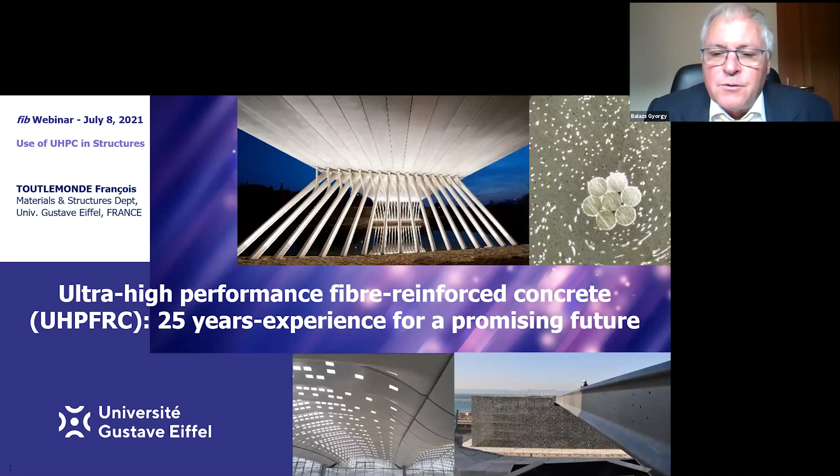I would like to begin with a personal word. I have to apologize because I won't speak in Arabic. I think one of the only words I know in this language is salam, which means peace, health, and salvation. I would first like to begin this presentation with these words, which I address to all the attendees from Iraq and other countries in the world. I want to say that it's my pleasure and my great honor to give you this presentation of

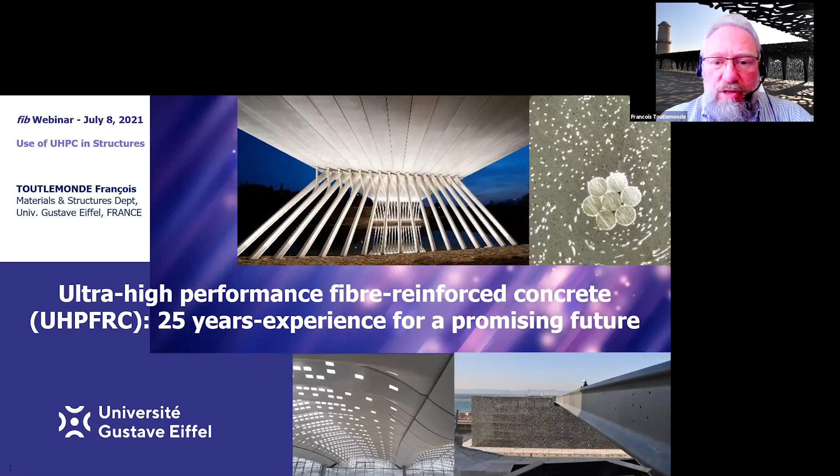Based on the experience of UHPFRC in France from 1996 to now, I would like to give some words on the definitions of what is UHPFRC, a short history of the implementation of these materials for structural usage. Then I will give some technical aspects of the properties of these materials and the way it's taken into account by the standards. I will give some description of fruitful or promising application fields, and we will have a special focus on UHPFRC for structural repair, and some conclusions.

So first, what's UHPFRC? I will illustrate this in my different slides with examples of this material. You see the example of a pre-stressed I-shaped beam that was one of the first applications of this material, used in France for repair in a nuclear power plant in a very aggressive environment. We have some photos with the material being cast or being mixed, and some shore views where you see that it's called concrete, but it's really not current concrete, and that's what I will try to explain.

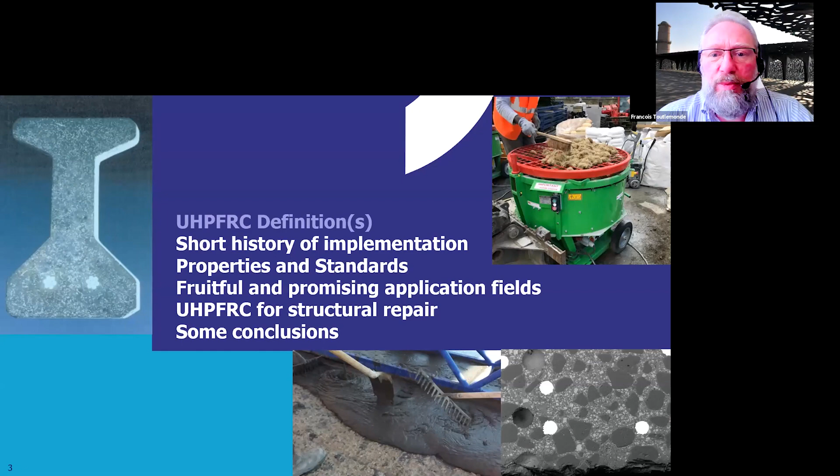What we understand in France as ultra high performance fiber reinforced concrete comes from the experience of the first mixes that date back 25 years ago: the reactive powder concrete developed by Bouygues, the BSI Ceracem by Eiffage, BCV by Vicat, and some other materials that now have new brand names like Ductal, BSI, SmartUp.

The main properties have been detailed in the first recommendations by the French AFGC, the French Association for Civil Engineering, which is the French branch of FIB.

The compressive strength was around 180 to 200 megapascal, as given in the recommendations edited in 2002, and later extended to 150 to 250 megapascal.

The direct tensile strength of this material is from 7 to 12 megapascal, and most importantly, the post-cracking stress for a typical 0.3 millimeter crack opening is also from 7 to 12 megapascal. So there is either hardening or softening behavior, but one of the key features of this material is that we can account on tensile capacity.

The Young's modulus is between 45 to 65 gigapascal, the total shrinkage is from 500 to 800 micrometers per meter, and the consistency at the fresh state ranges from self-leveling to viscous with threshold.

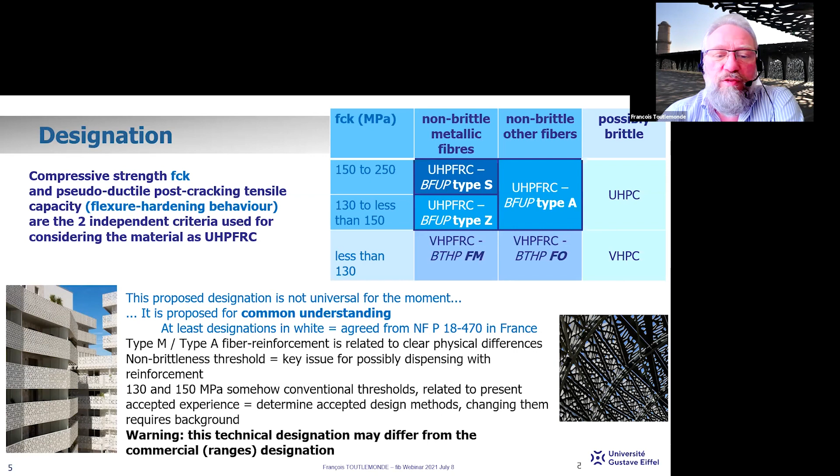A warning: this technical designation may differ from commercial designations that designate a range of materials extending from, say, 120 to 180 megapascal as compressive strength.

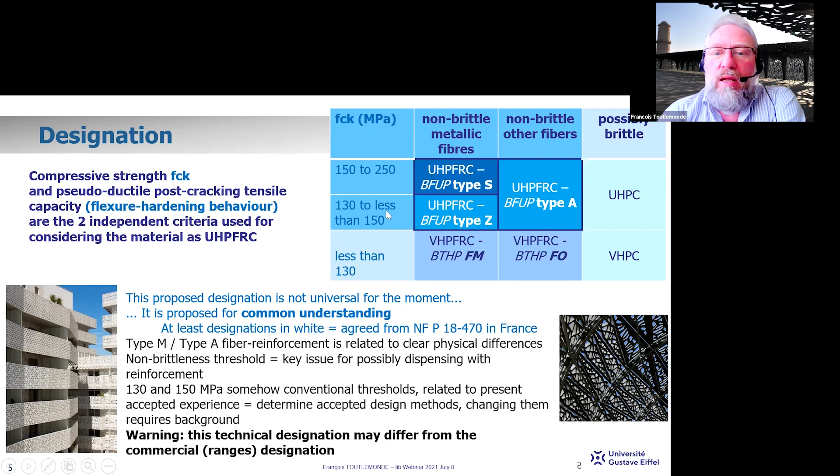So that was the generic terms you may have heard as engineers. But what I would like to explain now is more fundamental: what is UHP-FRC.

What we have to remind ourselves is that it's the result of the combination of three main ideas. First, the strength and compactness improvements of cement materials by intense reduction of the water to binder ratio. This was made more and more possible and efficient with R&D advances in superplasticizers and mineral additions. So UHP-FRC is a continuation of the macro defect free, or CRC, materials, beyond the HPC developed and used in the mid-80s.

This reduction in the water to binder ratio leads to modifications in the ratio between high density CSH and low density CSH. So this low water to binder ratio modified the balance between the hydrates in the cement paste. The second main idea, of course, is the fibers.

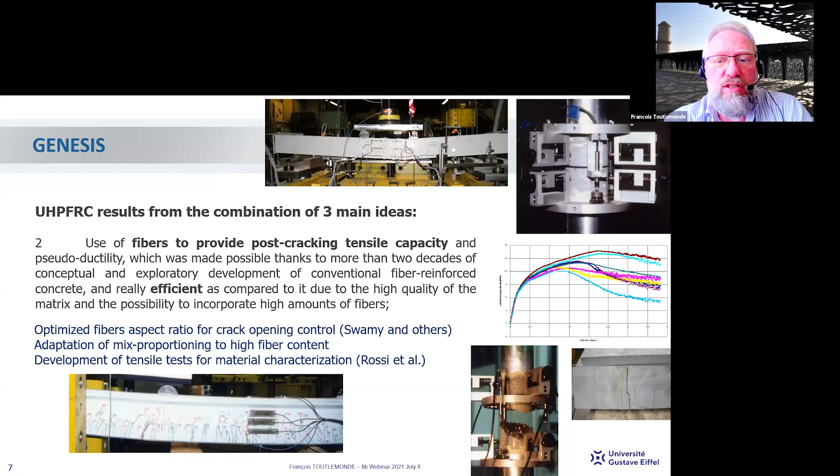The third idea is the reduction of natural imperfections due to aggregate, made possible by limiting the size of natural aggregates and selecting very high quality materials in an optimized grading. This took benefit of aggregate packing models developed in the late 80s, for example by de Larrard and other co-authors, and also took advantage of ultrafine additions developed from the 1980s, especially silica fume, which was used more and more.

From a human perspective, UHP-FRC is also indebted to pioneers who combined the three main ideas. I want to mention Pierre Richard, Marcel Cheyrezy, Gérard Birelli, Thierry Thibault, Gilles Chanvillard. These people were convinced that combining these three ideas could open the way to new horizons for cement materials. They promoted this combination as an answer to badly answered demands.

It was necessary to reduce the local brittleness of concrete materials, governed by material defects. UHPFRC had to promote industrial control in construction processes and products. It was a possibility to optimize the use of cement in a high added value material, which also had an economic value in terms of

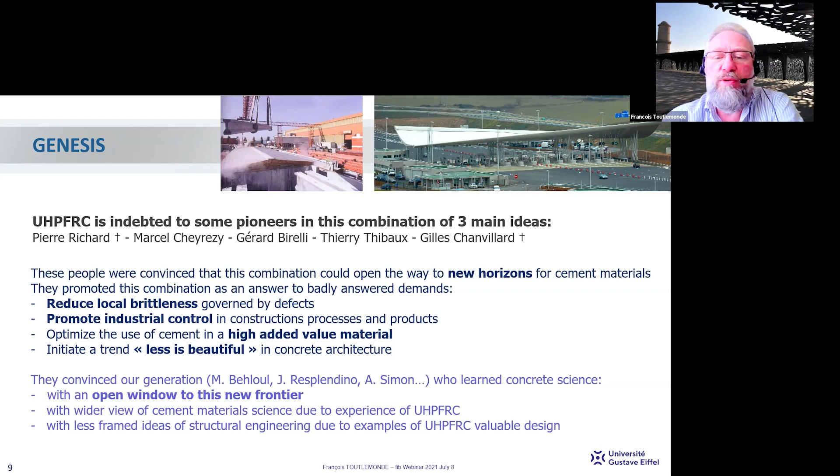That's the experience I would like to share with you. I will begin with the basic steps from the history of this material, and the first step I will call genesis, from the laboratory to the first demonstrators.

Let's remember, in 1990 the maximum strength in the French design code was just changed from 40 to 60 megapascal. Five years later, Richard and Cheyrezy presented the BPR 200 at the ACI convention, the conclusion of over 4 years of industrial development of mix proportioning and qualification.

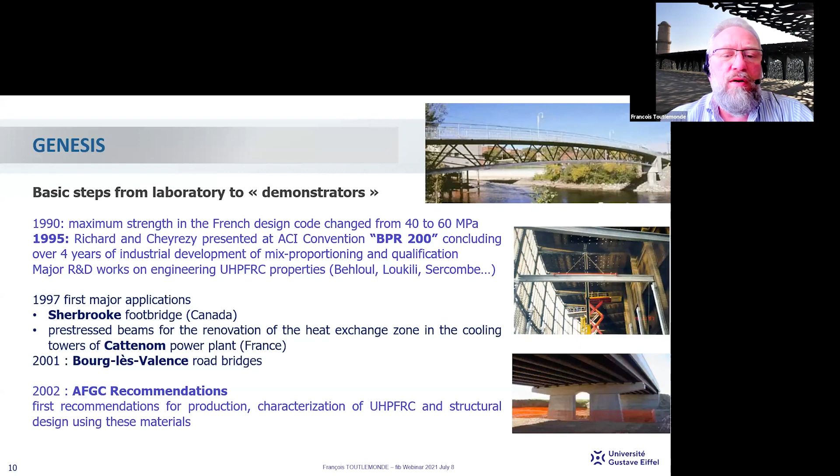And it was also the result of major R&D work on engineering UHPFRC properties. This led to the first two major applications in 1997: the Sherbrooke footbridge, and the pre-stressed beams for the renovation of the heat exchange zone in the cooling towers of the Cattenom power plant in France—about 3,000 beams and girders to support the heat exchangers. Just four years after, the first road bridge in Bourg-lès-Valence led to the first recommendations on these materials. So really, it's a short period of developing the materials and having the first real-size applications.

At this stage, the major features that are still valid now: the UHPFRC materials were industrially controlled, patented materials—a limitation that is now overcome. But what is still true is that it markedly surpassed the highest high-performance concrete available at the time. The minimum compressive strength at this stage was 150 megapascals. The post-cracking effective capacity possibly dispenses with the traditional use of secondary reinforcement. And because of the outstanding durability, with transfer coefficients at least 10 times lower than for standard concrete, it was anticipated that reduced covers could be used. What's important for the future of this material is that there was recognized a common interest of all stakeholders in scientific advancement and development of relevant implementation.

So UHPFRC was understood, I would say, both in continuity and as a breakthrough. The outstanding compressive strength properties promoted extreme optimization of pre-stressing, and the durability and lightness of pre-stressed members appeared as main advantages to be sought in structural applications. The absence of secondary reinforcement dispenses with keeping systematic continuity with traditional reinforced concrete design provisions. So the trend was to develop plain thin UHPFRC elements, which appear feasible. Finally, mixing, placement, thermal treatment, and formwork technology could be understood in continuity with the self-compacting concrete technology that was emerging and being recognized at this step. This was also very helpful in making the first applications.

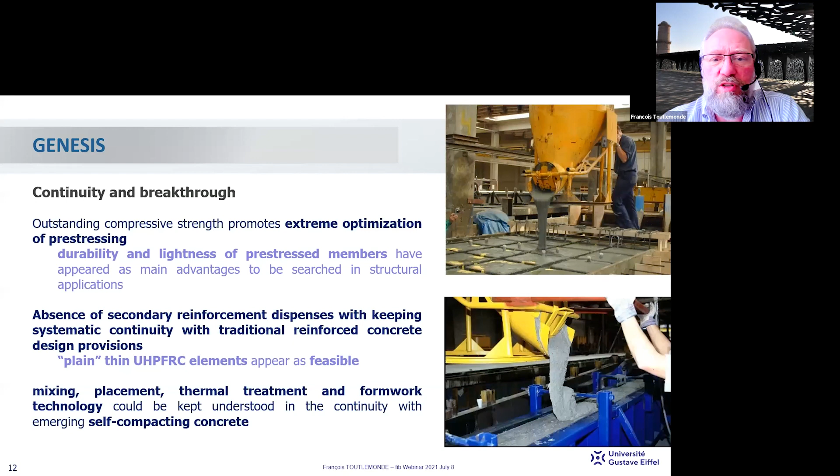So I'm sorry for this introduction that was a bit long, and I think Raad, you can give a summary of what I've tried to say in Arabic now.

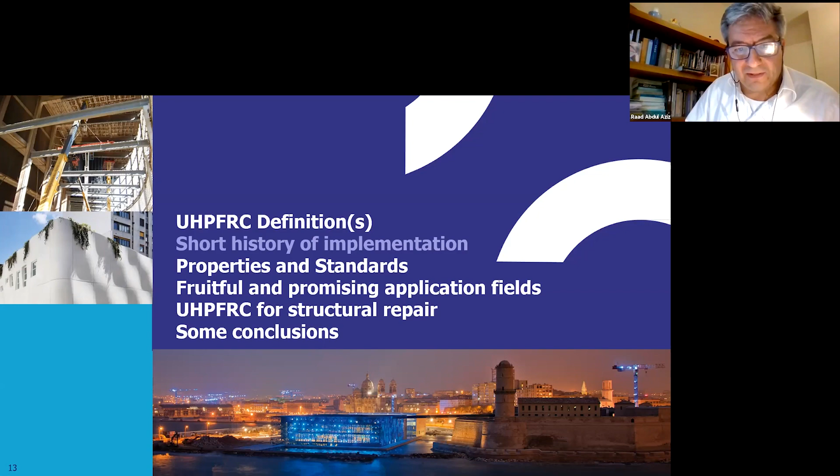Thank you. I will give now some illustration of the short history of implementation of this material.

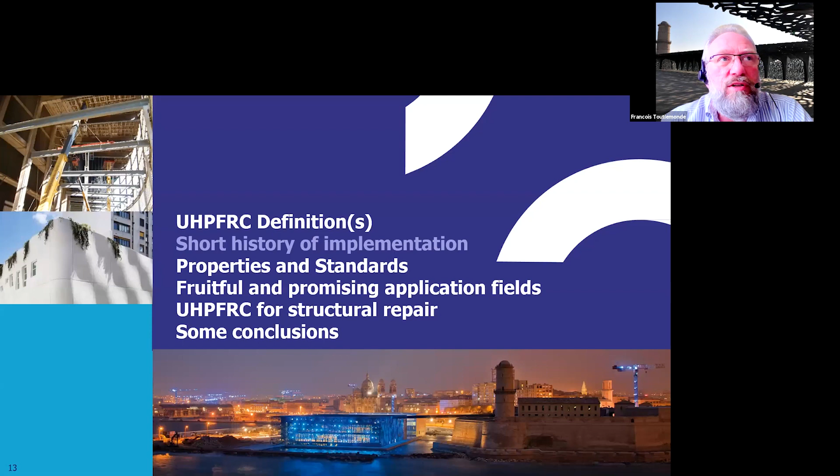Let's come back to 2002, where we have the first recommendations for designing and using this material. For the first decade, I would say the keyword is exploration, so architects and engineers tended to find the proper shapes in applying these materials.

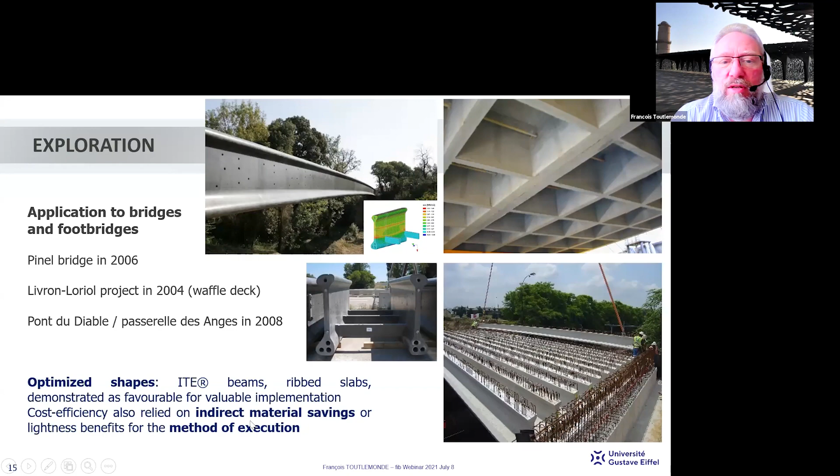So it was the discovery of new aesthetic possibilities associated to the durable mineral surface quality of this material, lightness and possible complex shapes, and a kind of semi-transparency with these net panels.

And this leads also to the development of the use of UHPFRC with organic or stainless steel fibers because of the durability of the aspect. And it leads to an extended range of mixes addressing the fire-resistant demand for buildings, and also a possible compromise between these properties and lower strength requirements.

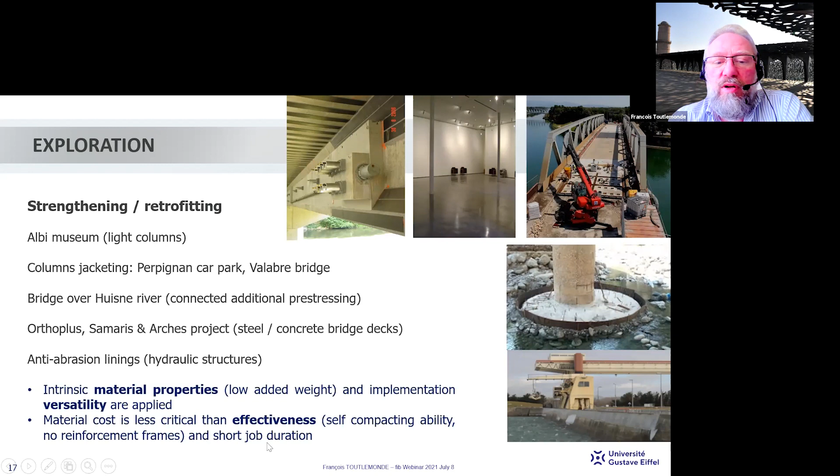These were really the first cases of these applications, and also anti-abrasion linings for hydraulic structures. The intrinsic material properties led to low added weight, and the implementation versatility thanks to the fluidity of the material were really critical for these applications. The material cost is less critical than the structural effectiveness, given the self-compacting ability, the absence of reinforcement frames, and the possibility of very short job durations.

Not only in France but in some other countries, these were the first implementations showing the optimization of technical solutions for civil engineering. In these cases, UHPFRC is somewhat less visible, but it's technically optimized, and it also corresponds to a business takeoff.

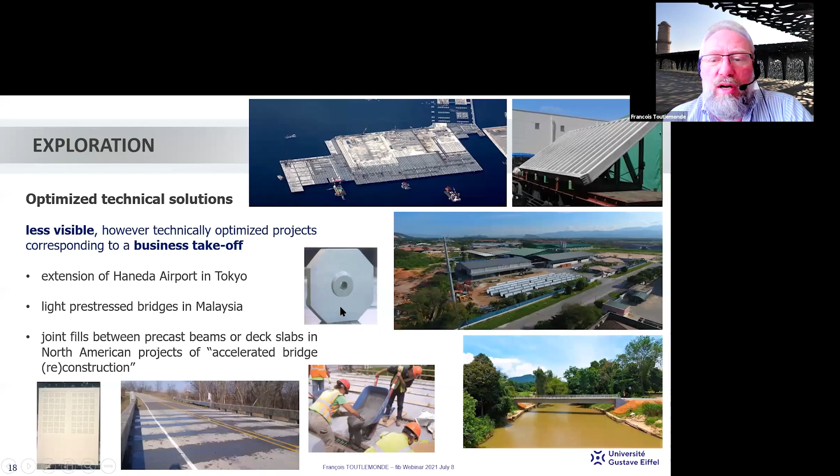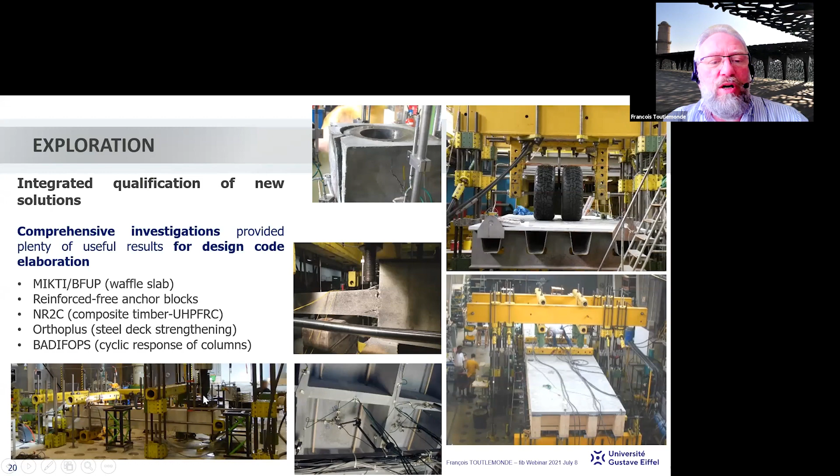This research was not only at the material scale but also involved integrated qualification of new solutions. For example, the qualification of reinforced free anchor blocks for post-tensioning, development of timber-UHPFRC composite solutions for short bridges, development of UHPFRC overlay to stiffen steel deck bridges, and here a test of a column with both axial compression and the effect of a seismic load applied transversely.

The year 2013 corresponds to a milestone for UHPFRC in France after this phase of exploration. We had an international symposium on this application, and we were also able to make a revised edition of the recommendations, taking experience from all these projects. What's important, we also have the inauguration of two iconic projects associated with urban renovation: the MuCEM in Marseille, and the Jean Bouin Stadium in Paris. This made really a wider awareness of the technical and architectural capabilities of UHPFRC, both among professionals - architects and engineers - and for the public, including clients of the constructions. Also, the technical acceptance of the design of industrial processes and details associated with these large projects, as well as the previous satisfactory experience of building components and bridges made with UHPFRC, made it possible to launch the standardization process in France.

So, some illustration of these key demonstrative structures and applications. The MuCEM is a museum on the Marseille harbor. For this project, there were more than 300 net panels for the facade, about 2,000 square meters of thin deck slabs, more than 300 tree-shaped columns, post-tensioned columns, and 2 footbridges that you see here, about more than 70 meter span. And here what you see are the hangers for the external decks.

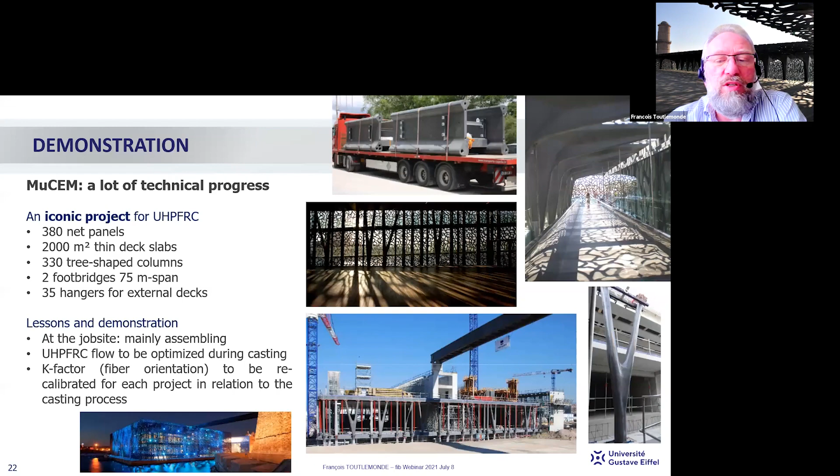Main lessons of this project: these were mainly precast elements assembled on site. For the realization, the UHPFRC flow turned out to be optimized during casting, and this was quantified with the fiber orientation factor, which had to be recalibrated for each project in relation to this optimized casting process.

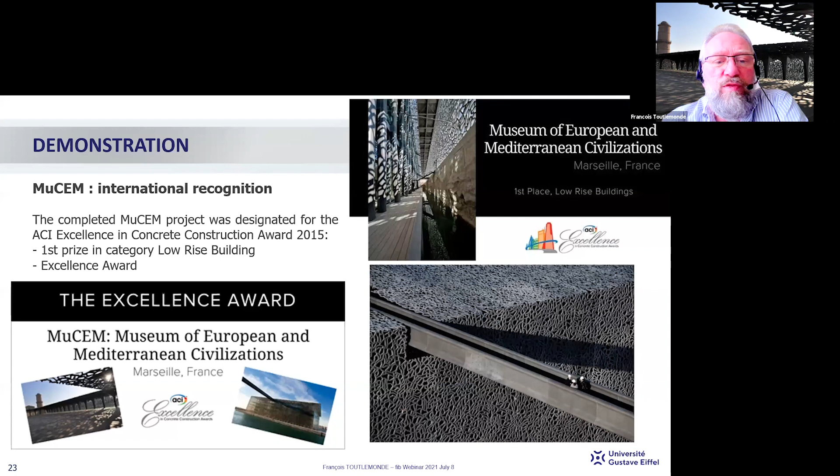There was also, which is important for the development of a material, international recognition with the ACI Excellence Award for the museum in 2015. And also the same year, the Jean Bouin Stadium obtained recognition for the category of decorative concrete for the same ACI Excellence in Concrete Construction Award.

So there's a chain between characterization of the material, design optimization, and optimization of the casting process to avoid disturbed flow zones without the fibers, especially because the net panels had to receive glass blocks in between. So it was really necessary to demonstrate the ductility and structural continuity of these elements, because of an issue of public safety that had to be demonstrated.

I just mentioned in the same period the renovation of the Chillon viaducts, but Dr. Raad will give more explanation of these really demonstrative applications of UHPFRC for bridge rehabilitation.

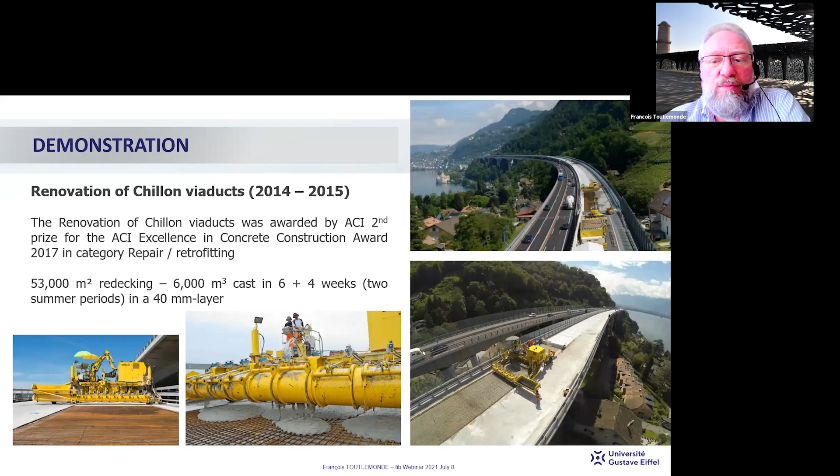I think, because the explanation is very clear, I will just give the headlines of this part.

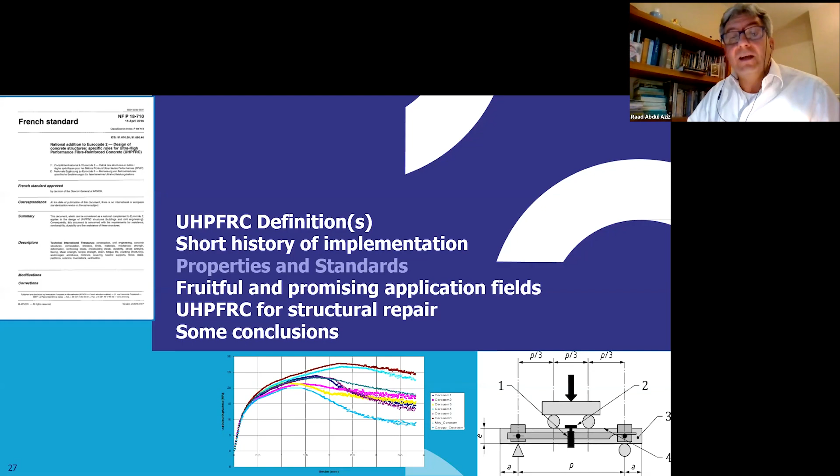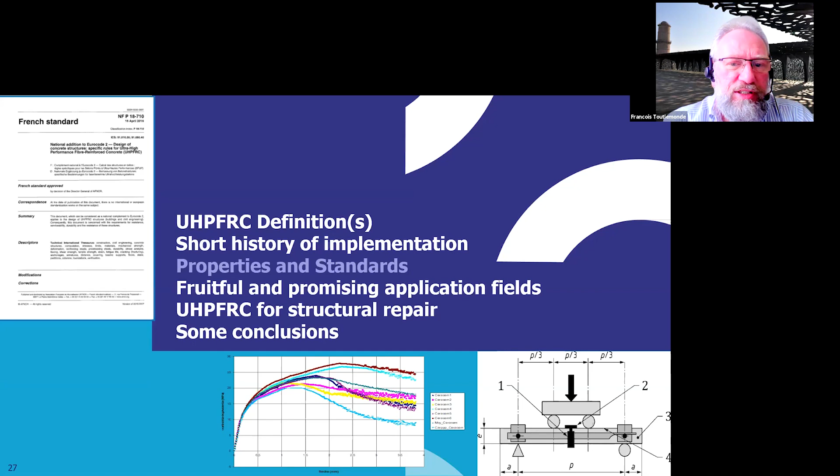So let's have now more detailed explanations of the UHPFRC properties as described in the standards. The motivation for standardization appeared as a key step for the growing business made possible by the successful applications that I presented.

The idea was to clarify the specifications and accepted design rules, to have fair competition among solutions, and easier acceptance of UHPFRC solutions from owners and insurance companies. There was a growing awareness among all interested parties, so the standards could be elaborated in groups with all stakeholders and experts represented.

And of course, the standards were also more easily developed based on the consensus of what we had in the recommendations, and the consolidated experience gained over the 15 years before.

The standards sought to comply with the FIB Model Code 2010 principles available at this stage, and also with the format of European standards, which made implementation and understanding easier at the international level. What's also key for the standards elaborated in France is that we needed wide purpose standards.

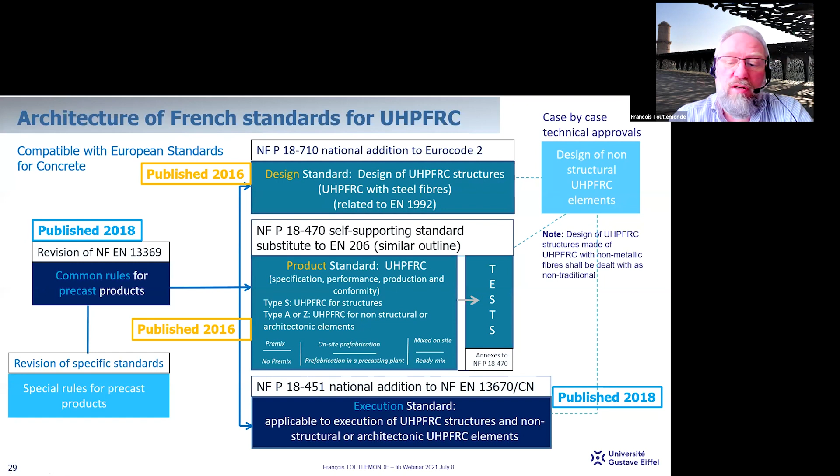What's still not covered is the design of non-structural UHPFRC elements, especially made with non-metallic fibers, because at the moment of elaborating these standards, it was considered that there wasn't enough experience with this type of material.

I'll try to give you briefly some of the key features of these standards. For the design, as a national addition to Eurocode 2, the frame of Eurocode is kept and many clauses are unchanged. We follow the Eurocode outline, which clarifies the way we express the requirements.

Based on the practice validated from the beginning of the implementation of the material, the tensile capacity of UHPFRC is taken into account even when cracked, and this makes it necessary to define a specific partial factor. The effect of fiber distribution is taken into account with a set of orientation factors.

The cover to reinforcement or tendons is reduced due to the high durability, but the quality of placement imposes a cover thickness higher than 1.5 times the length of the fibers, except where demonstrated more specifically.

The ULS cross-sectional design is based on a diagram of admissible strain, so it's really in continuity with reinforced and pre-stressed concrete. But the cases of reinforced or pre-stressed concrete versus plain UHPFRC have been clarified with the specific ultimate strain to be met in this diagram.

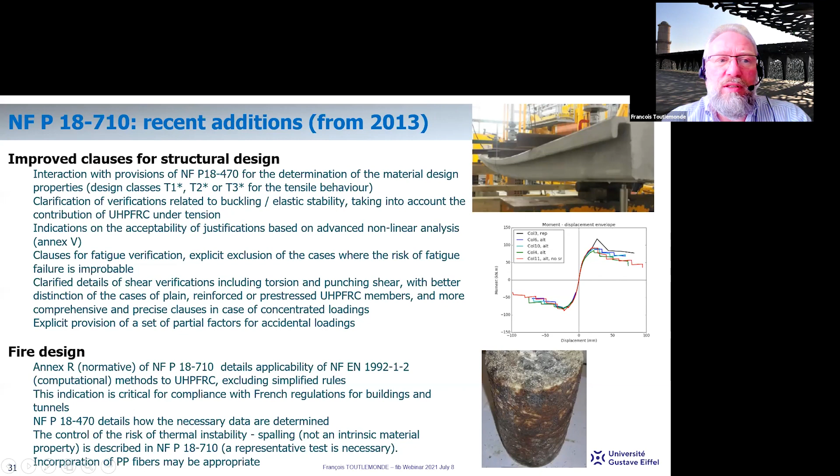Let's go to the material standard. It gives the minimum requirements to call a material UHPFRC. As I've said before, there is a criterion in terms of compressive strength higher than 130 megapascal and 150 for structural applications, and a minimum elastic tensile strength of 6 megapascal.

A minimum non-brittleness rule is expressed as a post-cracking tensile equivalent stress between 0 and 0.3 millimeter crack opening, higher than 40% of the elastic limit and higher than 3 megapascal.

Minimum durability properties include water porosity lower than 9%, a chloride diffusion coefficient lower than 0.5 times 10 to the minus 12, and a gas permeability lower than 9 times 10 to the minus 19 square meter.

For easier specification, classes are given for compressive strength, for description of the tensile behavior (softening or hardening), classes for improved potential durability, consistence classes from self-compacting to viscous with threshold, classes related to thermal treatment, and abrasion resistance classes.

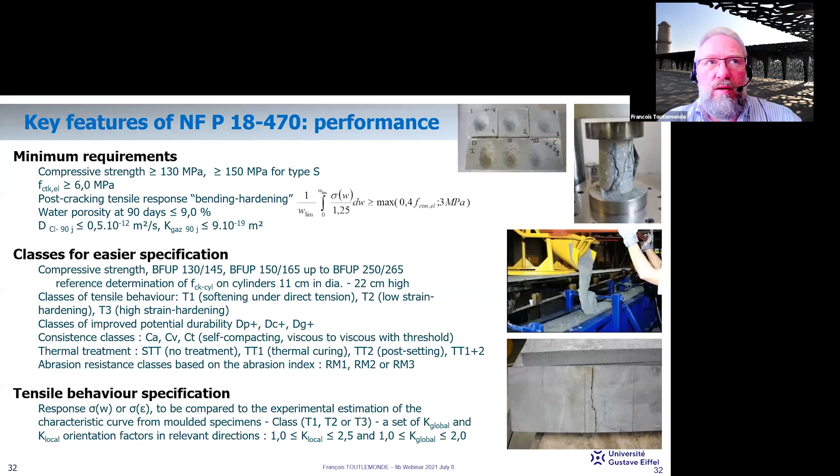A set of orientation factors is given and has to be checked in the relevant directions. This orientation factor has to be between 1 and 2.5 for the local factor, and between 1 and 2 for the global factor. This may lead to reconsidering the way of casting the material so that the orientation factor is consistent with what is necessary for the tensile forces equilibrium in the project.

This leads to a special chain of conformity assessment for this type of material. There is a design study carried out by the producer to verify that the mix allows meeting the project requirements and is robust enough for the project.

When there is an identity card, this may replace the design study. But a key step that is not so classical for concrete in general is the suitability test, which is part of the initial testing and is in fact a trial production. The aim is to verify that the required properties are met in the specific production conditions of the project, and it fixes the effective production and mixing process, the transport procedure, the procedure of placing, finishing, curing the material, and the protocol of thermal treatment, if any.

This comprises the production of a representative prototype element carried out under the responsibility of the user of the UHPFRC, to check whether the specified performances are met, especially the orientation factors. This is really a difference with classical concrete, in that the user of the material is also partly responsible for the conformity of the material.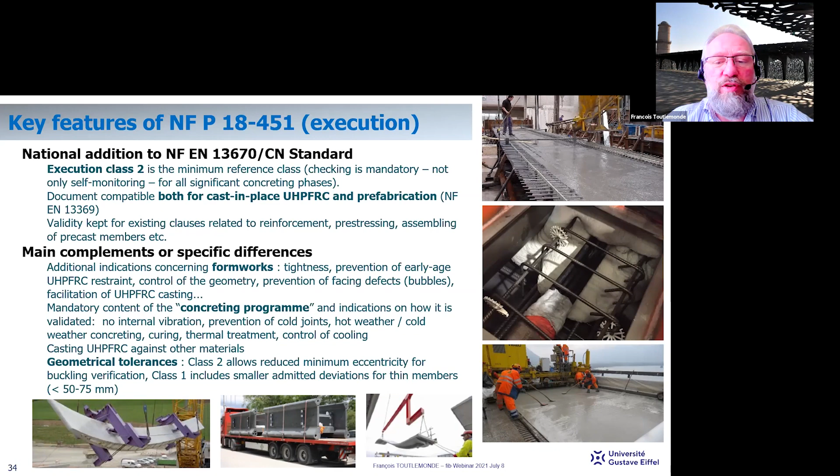The last main part of this standard is the geometrical tolerances. There are two classes, and especially there are smaller admitted deviations for thin members that differ from what is in the present standards.

As a conclusion of this part, what's the situation now with the standards? We can see that all UHPFRC mixes are not similar, so the list of characteristics necessary for projects is clearly longer than for regular concrete, and prescribers have to become aware of this.

It saves time to use UHPFRC mixes with identity cards, because we already have a first control that material properties will be met for the project. This is a matter of specific care in case of alternative bids in answering tenders. And what's important, maybe more critical than in classical concrete, is the interaction between material and design, which of course has an incidence on costs and methods.

What has to be kept in mind is that UHPFRC is not only a premix nor mixed proportions, and the suitability test is critical to validate the concreting process and program, post-casting treatments, meeting the K-factor requirements. This is a matter of combined responsibilities of the UHPFRC user and producer.

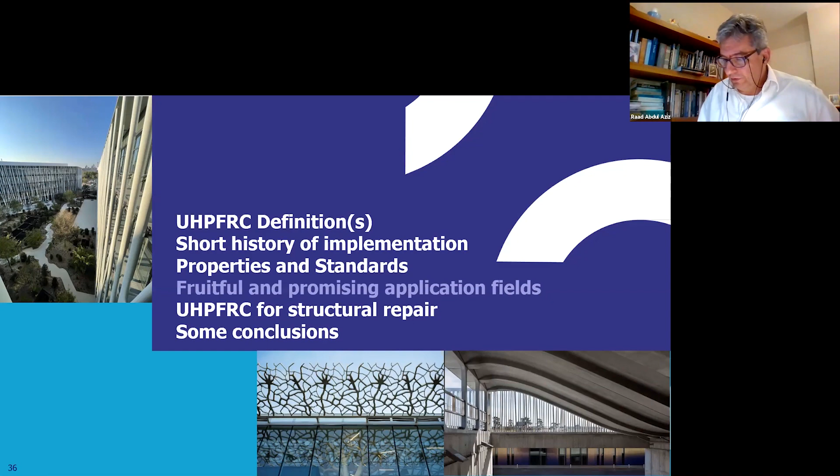So I would try to give you now a picture of what can be considered as the fruitful or promising application fields of this UHPFRC material, based on the present trends, especially in France, though the situation can be diverse in other countries, but it can also give you some ideas.

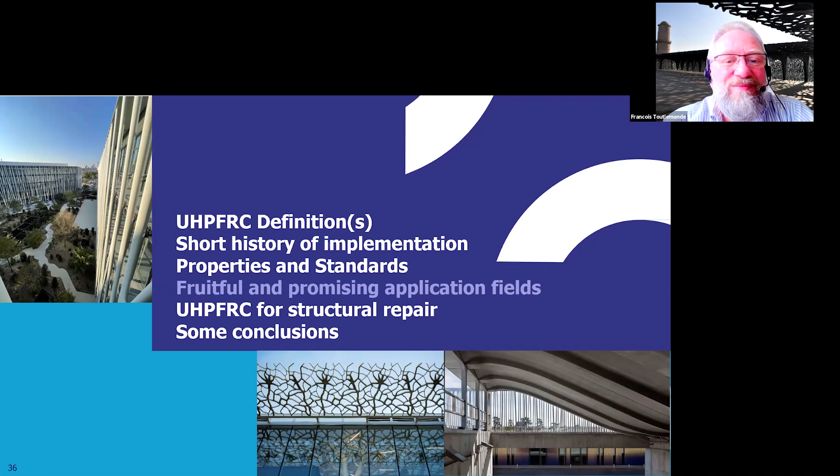So first, I come back to the applications in footbridges. What is searched for in these applications is slenderness and lightness. We have records of slenderness, for example, for the Angels footbridge. What's taken benefit of is the performance in compression associated to post-tensioning, the performance in tension for the transverse bending and shear, and the cost efficiency for the erection with lighter false work.

What's also interesting is the architectural versatility - we have examples of truss, of Pi-shaped, of side beam supporting structures. For these structures, one point to be aware is the critical control of vibrations. I think an issue for the future is the balance between signature bridges and replicability, which is in the sense of cost efficiency.

As an example of repeatability, there was an optimization of the inverted T-shaped beams with a widened flange - that's the symbol of ITE in France. This shape was optimized for prestressing efficiency, which enlarged the capacity of the lower flange. The introduction of the pre-stressing force is shifted because there are a lot of tendons, as you can see here. There are no stirrups for shear except at the end for the highly skewed bridges.

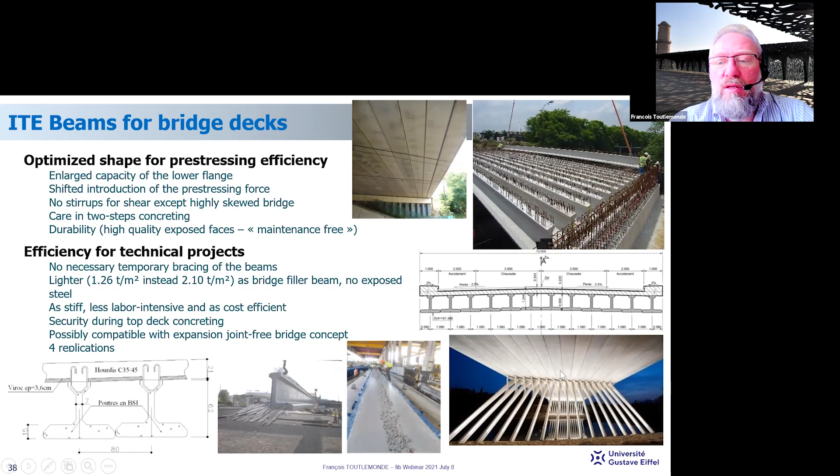So there are 4 applications for the moment of this type of solution, and here especially the La République bridge in Montpellier, where you see the deck is made of these T-shaped beams.

Another favorite shape for UHPFRC application is columns, because it's a direct application of the compressive strength performance. There's the possibility of ultra-thin columns, for example in case of buildings retrofitting, or ultra-thin jacketing for increasing the load capacity. It can be applied for a self-supporting facade, or for external thermal insulation of a building.

And the architectural versatility is made possible by the material performance, with this type of tree-shaped columns.

Some points to be addressed: the buckling verifications with respect to the tolerances, the fire resistance requirements if relevant, have to be integrated. The seismic behavior and the ductility have to be assessed, and this may require some specific justifications. Also, one of the key aspects is the optimization of the assemblies when these columns are very high, so as to have durable and efficient solutions.

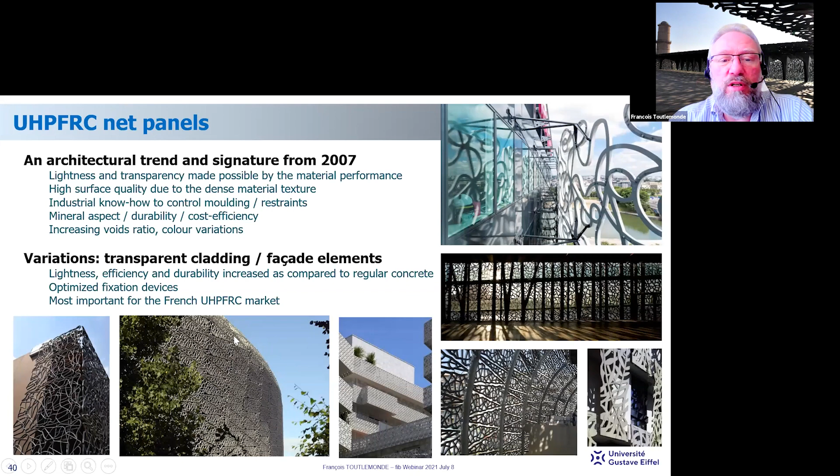In the continuity of these elements, the roofing elements are generally made of larger shells. So it's a key field of application for architecture. The lightness allows larger spans. The cost efficiency is based on the low dead weight in a global design.

So some variations for this type of applications. In case of ribbed solution, depending on the span, there could be reinforcing steel or post-tensioning. There could be ribbed plates or shells. Here again, one of the key conceptual design issues is...

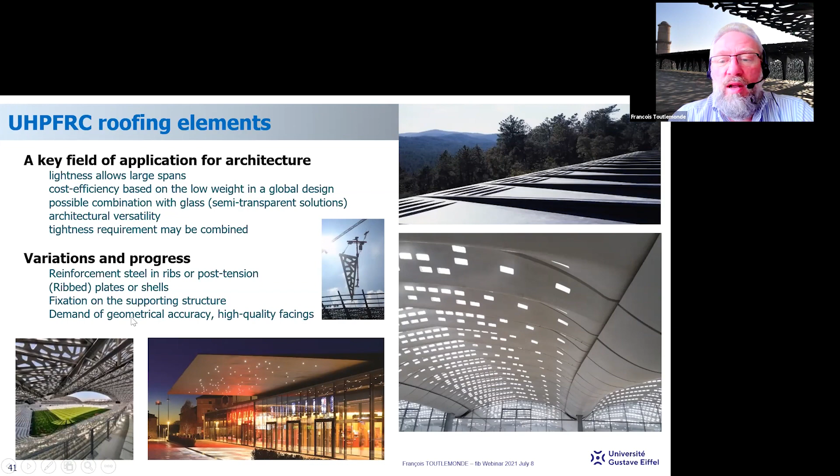...the way it's fixed on the supporting structure. And of course, it demands high geometrical accuracy and high quality facings, which is an important skill of the precaster.

I'll briefly mention here the contribution of UHPFRC for structural strengthening, because these solutions are more and more adopted because it's generally low intrusive - the performance of the material makes it possible to keep the material addition light, and it has a limited incidence on the supports.

So it takes benefit of the material performance in compression for longitudinal bending and in tension for transverse bendings on supports. Both performances are applied for the post-tensioning anchor blocks.

Because of the high Young's modulus, the UHPFRC additional elements may keep the flow of forces, which alleviates what is taken by the existing structure.

And of course, it takes benefit of durability, tightness, resistance to abrasion, and the compatibility with the existing steel or concrete support. The condition of optimal implementation is...

...the fact that the material quantities can be saved so that the material cost is not so much critical. The material, the works execution, and the logistics have to be optimized simultaneously.

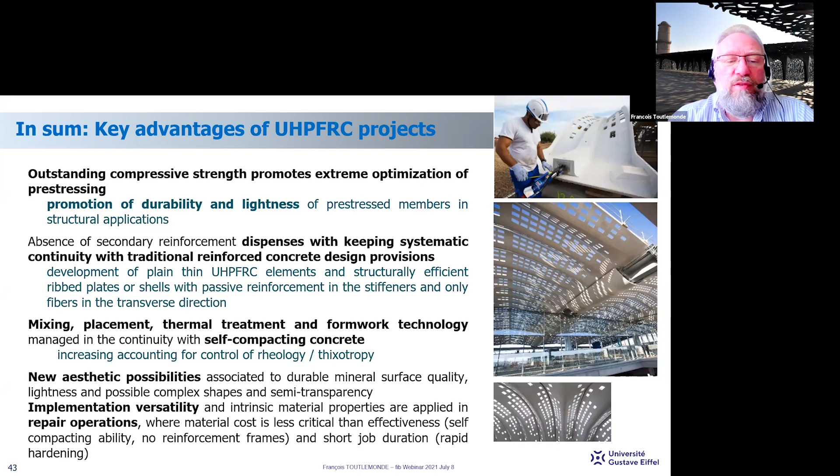Okay, as I said, the implementations for repair operations is also very attractive. I think we have the Arabic translation, and then I will focus on the use for structural repair with some examples.

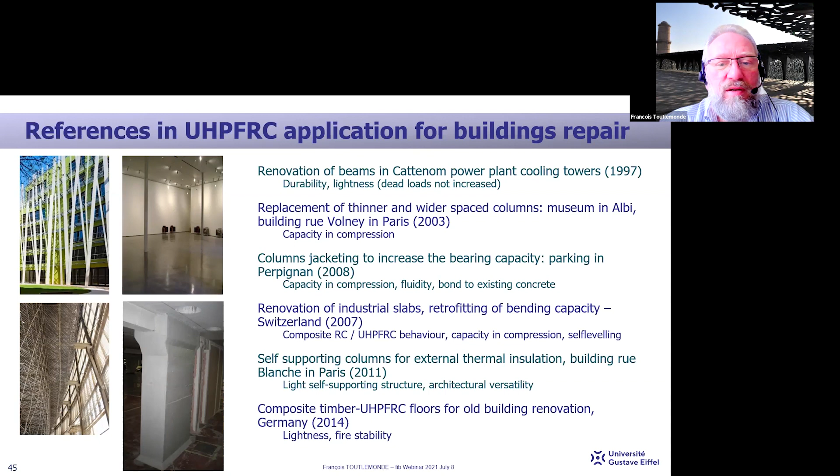I mentioned the steel bridge deck strengthening because we have a generic issue with orthotropic deck bridges, at least in Europe and Northern Europe, because these structures are very much sensitive to fatigue, especially at this junction between the troughs and the plate.

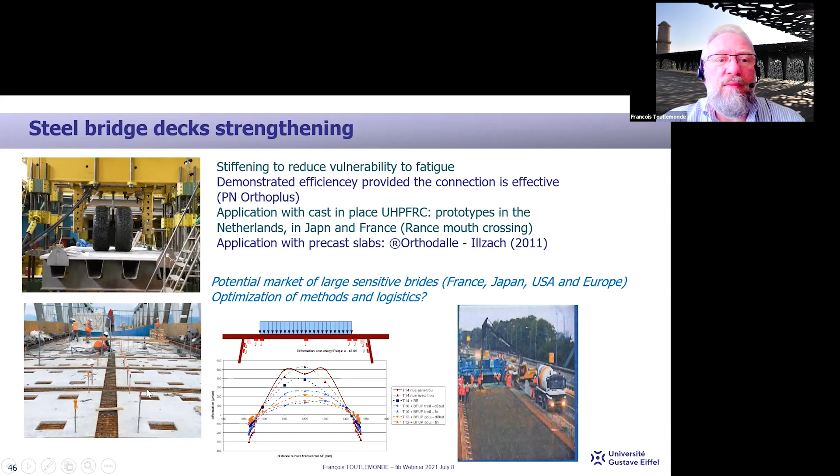I will be very brief on the stiffening of concrete bridge decks because this has been mainly developed in Switzerland from the European project Arches and Samaris, with the example of the Chillon Viaduct and more than 100 bridges.

One question for me is why this is a very important market in Switzerland and not really effective for the moment in France, although we have some zones where we have an intense use of de-icing salts, and this preventive maintenance approach would be probably more cost efficient.

So this is probably a future market for the retrofitting of composite bridges, and also for the widening of urban bridges or bridges under heavy traffic because of the possibility to reduce the duration of the job site.

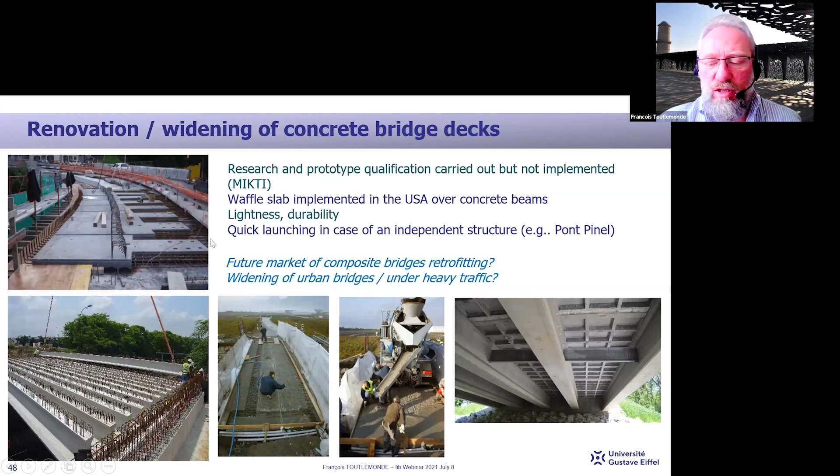I illustrate with two examples in Thouaré-sur-Loire and Mauves-sur-Loire, cases where we had a full deck reconstruction. These are long steel bridges where the deck was formerly made of brick vaults, and the steel beams were damaged by corrosion because these vaults' water tightness was lost, and the vaults were much damaged.

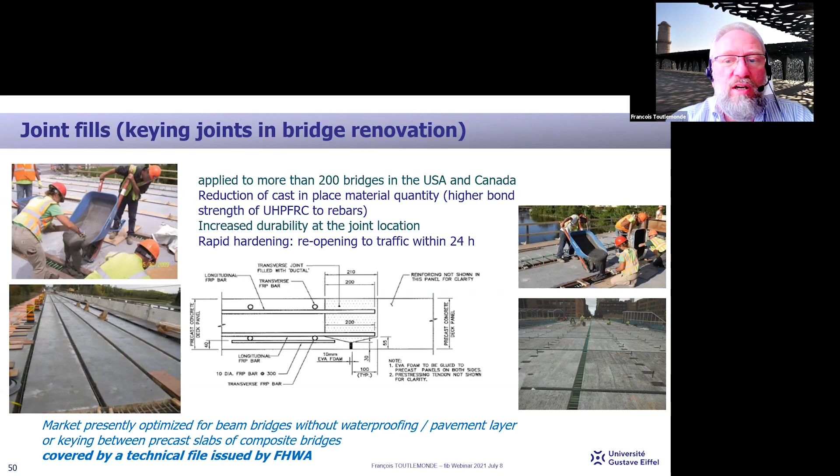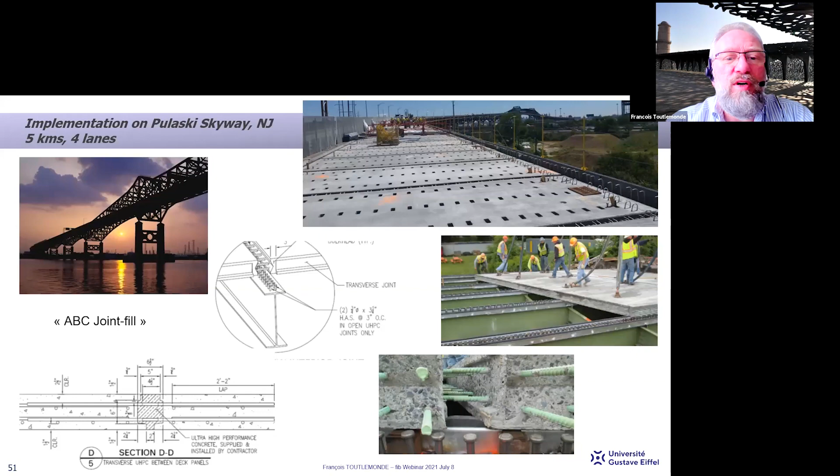Here is an implementation of UHPFRC for keying joints and overlay on the Pulaski Skyway in New Jersey. Also attractive is the UHPFRC used for anchoring the anchor blocks for additional post-tensioning, which has been implemented especially recently in the Hammersmith flyover in London. This makes it possible to have surgical operations for this type of bridges.

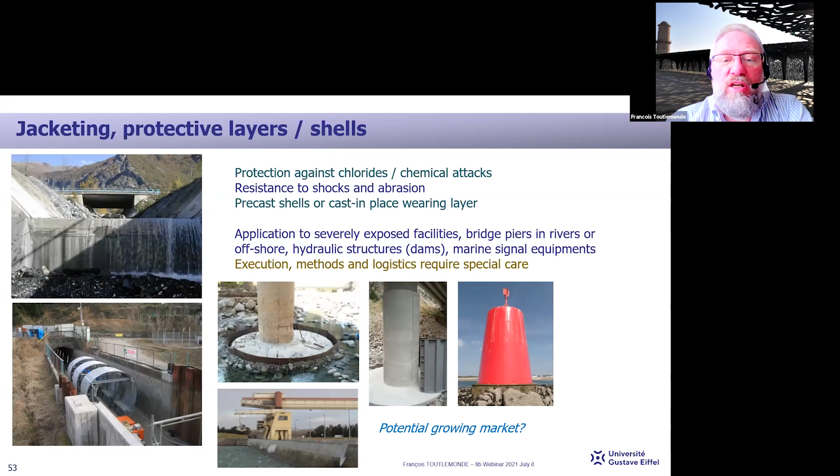So probably because of aging infrastructures, this could be a growing market. If we try to list what is necessary for efficient UHPFRC application in such repair operations, of course we have the specific features of low intrusiveness, lightness, the bearing capacity of the material itself, and the fact that material cost is generally less critical than methods and logistics in such operations.

So the advantages that are generally key aspects of cost efficiency are the optimization of added mass, the reduction of operation duration by prefabrication or adapted rheology if cast in place, the durability and resistance to abrasion, and the conditions of correct implementation are the relevance with respect to possible alternative techniques.

For example, UHPFRC is more fire resistant than solutions using fiber reinforced polymer materials. It can adapt to complex shapes, it keeps stiffness and bearing capacity under compression, and there's also the possibility of underwater casting.

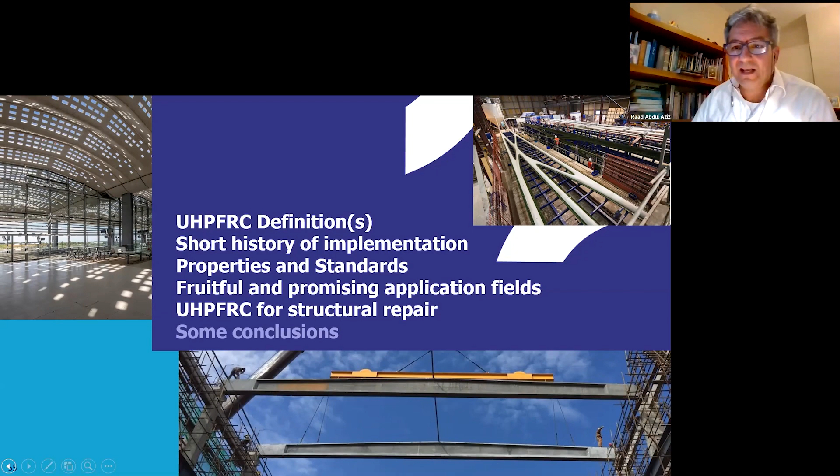Yes, Professor. So very briefly, some conclusions. What's the situation now? I would give a perspective on the new frontiers of UHPFRC. I think the UHPFRC offer gets wider, and there is increased competition between suppliers of these materials. There's variability in constituent sources, the possibility of having greener UHPFRC mixes, and the balance between cost reduction and stable quality of the material.

One of the consequences is the need to have a fair indication of what is in the UHPFRC offer, and what's the choice for the properties. This may require education of the prescribers, the designers and contractors, so they understand which type of UHPFRC they need for their project. Standards may help, but there is still an issue of how we consider UHPFRC materials that are just outside of the standards or at their limit. Probably we have to make an effort in extending the standards to cover materials relevant for other projects, which may still not be UHPFRCs.

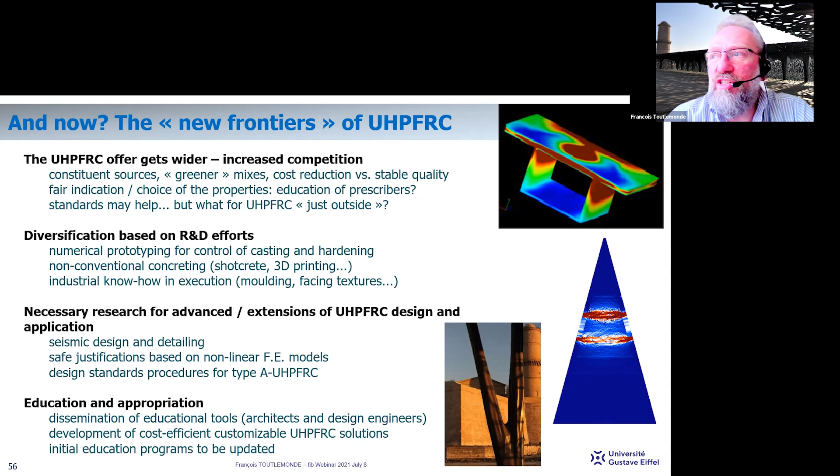So one of the challenges is the dissemination of educational tools for architects and design engineers, the development of cost-efficient, customizable UHPFRC solutions, and updating initial education programs so that younger engineers know UHPFRC, not only the concrete of their grandfathers.

There are some questions to address on the cost-efficient performance of UHPFRC. One key aspect is how to answer, with UHPFRC, the high durability demands concerning marine structures, protective structures, road equipment, industrial buildings, and urban furniture.

I think UHPFRC can offer a lot of solutions, but we need architects, designers, and prescribers who can think in terms of UHPFRC solutions. Also, UHPFRC is part of sustainable solutions for protection or strengthening, being a strengthening component for bridge decks and light cladding elements.

I have given some additional pictures that you will recognize supporting these questions. What I would say in closing is that UHPFRC is now open for creativity, and you have some examples of projects that are not really classical concrete projects, made possible by this material. So it's up to you now to know what you can build with it.

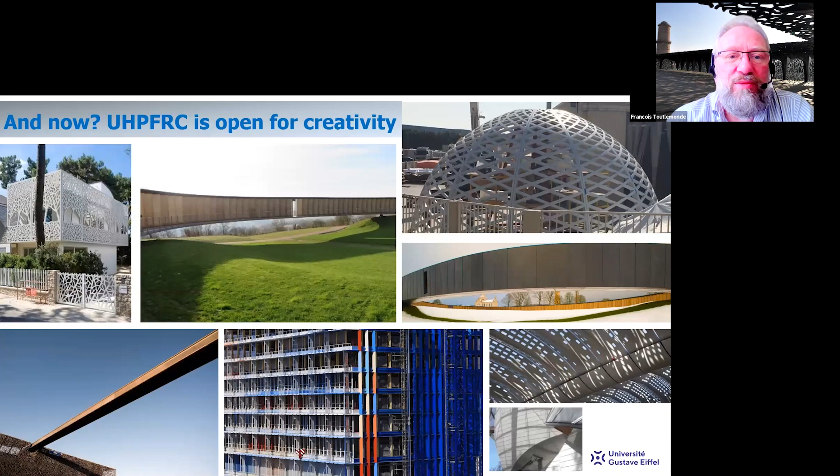I would like to conclude with some references if you need further information. There should soon be a publication of an FIB bulletin on FRC that has been prepared, and I think we are just at the end of the preparation process. One of its chapters is dedicated to ultra high performance fiber reinforced concrete, with a lot of information.

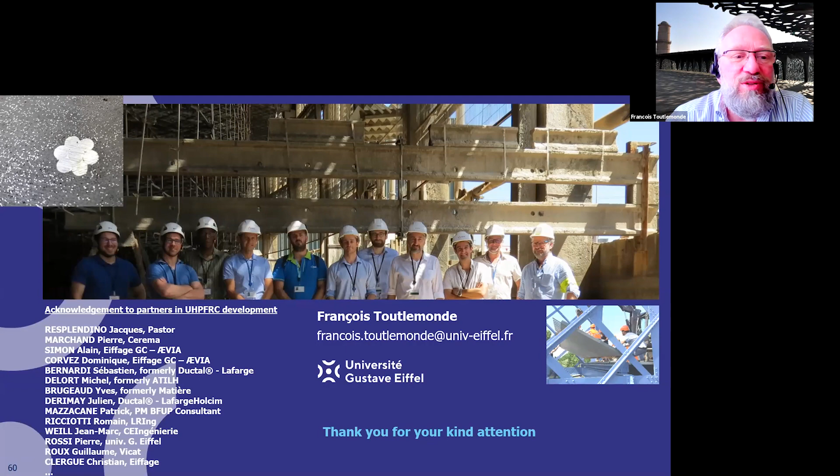Finally, I would like to thank you for your kind attention and acknowledge all the people I've met and worked with in this part of the history of my professional life dedicated to ultra high performance fiber reinforced concrete. Thank you very much.

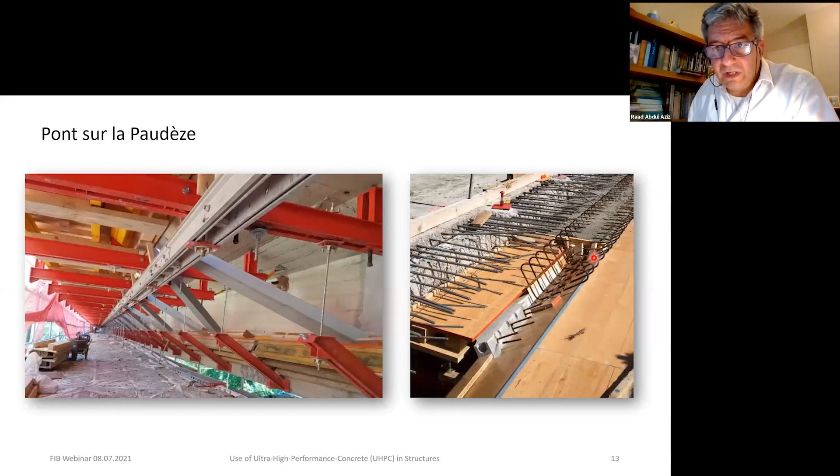تم إنجاز الجسر مثل ما قلنا في عام 2019، وكان تم إكماله بشكل كامل.

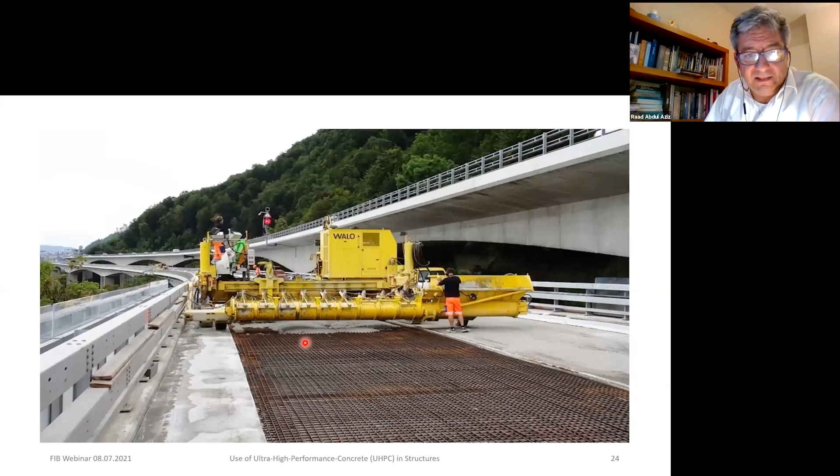بعض الصور لعملية الكيورينج.